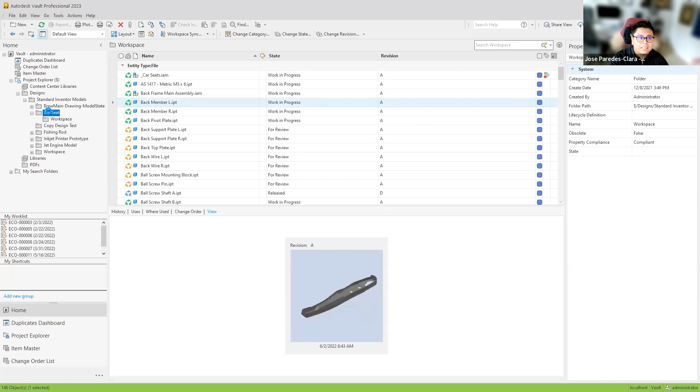I did mention searching. If you're familiar with the folder structure, you can quickly get to your models since they're easily labeled, and you'll get to the right place. But if you're at the very top or you're new to the folder structure, like a recent hire, there are a couple ways you can find things.

There's a quick search up here. If I'm trying to find those car seats, I can find that assembly here really quickly. Or if I'm trying to do a more in-depth find, there is the Find tool up here.

Control F or the button will lead you to a more advanced search. With those properties—whether you have a project number, a die number, a part number, things like that—these are all searchable within Vault.

Again, if you're new to it and somebody tells you to use manufacturing number 123, you can add that criteria. And then if I only want to see the drawings, we can go to file extension and say I only want the IDWs. You can add that criteria.

What's nice about this Find tool is it's an AND, not an OR. So you can make your searches as specific as you want, and it'll only give you the results that fit that description.

Of course, you can change the conditions—'is' will make it more explicit as opposed to 'contains,' which will find it if it's anywhere in that value. But be careful with setting criteria, because the more criteria you set, the narrower the results, and if it doesn't match any files, like you see here, you won't get any results.

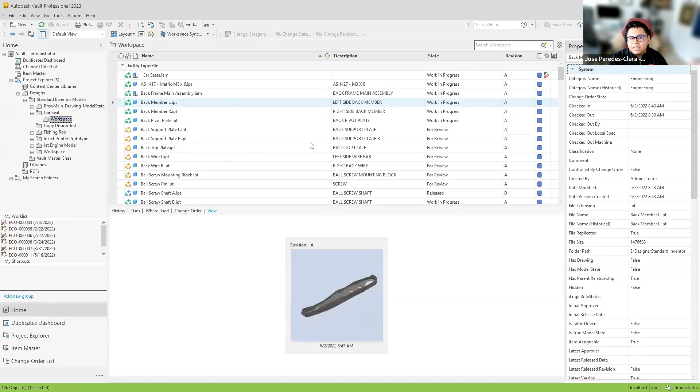So a lot of the things you'll see here are pretty well set up for the properties that they need. But the ones that aren't, you'll see a little red tag here, or a tag with a little red button. If I click on that file and then look at the properties that it has, you'll see that one of the properties that's required isn't filled out.

You can actually set up stage gates, or your company will set up stage gates where this file can't move forward in the release process until it has all the required properties. That's one of the biggest things that we like to configure too. Description,

all the files that you're creating, all the files that are added to the vault should have a description. You should know what they are or what they're for. That way they can either be found inside of the vault by searching, or if you do have smart numbering going on, they're able to be found a different way other than just by their number.

So by setting these required properties, when you try to send it forward, it should stop me. So if I try to send it here into review, it'll pop up a window. So let's say I'm just working as a regular engineer. I'm trying to get these car seats approved, get these car seats reviewed. I'm trying to send the assembly, but it'll pop up a window.

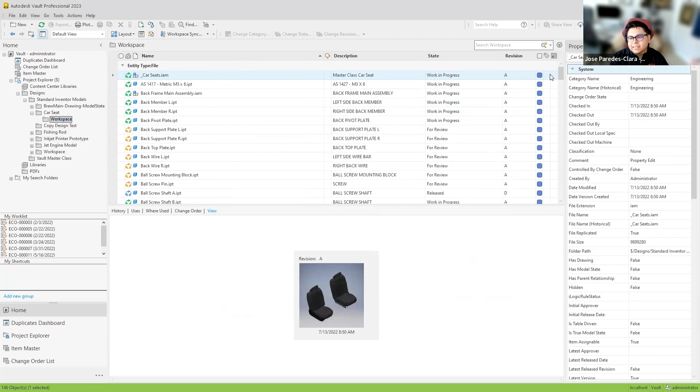Now that I updated that description, you'll see that the tag went away. It's compliant. So if I were to come in here and change the state to review, it'll go ahead and let me. You'll see that now that it's in review, this file itself is locked. And that means I can't check it out. So if I were to check it out here, nothing happens.

This is what happens to ensure that the file is being reviewed. But the file is the same for everyone that's reviewing it, right? Last thing you want to do is submit your assembly to review, our people that are checking it look at it, and there's changes to it. Somebody else went in after you checked it in, after you made your review. Somebody else went in and made changes. That's not something you want to deal with. That's not something you want to have to worry about.

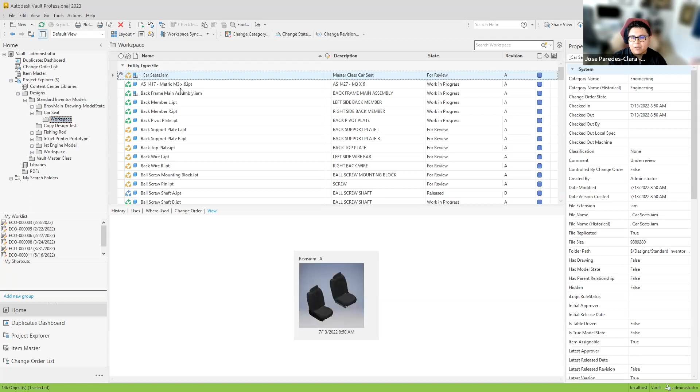So when putting things into review here, it'll lock that file, make sure that, hey, the last time it was modified was, let's see, it would be July 13th. That's the last time it was a work in progress. I edited some properties. That's pretty much what it did before it went into review, right?

You can always keep track of it. That's another thing about Vault. It keeps track of the history. You can always backtrack and say, well, I made this modification on July 13th. Here's the proof I made the edit.

So, you can keep track of that. This would then go be reviewed by certain people, make sure that the engineering is sound, the model looks good, things like that, before they would come inside of Vault and change the state to released. Once it's approved, it goes into a release state.

And this again will have some... Oh, yeah, we'll talk about this in a bit. So released will have some things that, once a file is in a release state, we will have some other options of displaying it or showing it, primarily in the thin client, which we'll talk about in a little bit. But this is another thing that we can do during our stage gates.

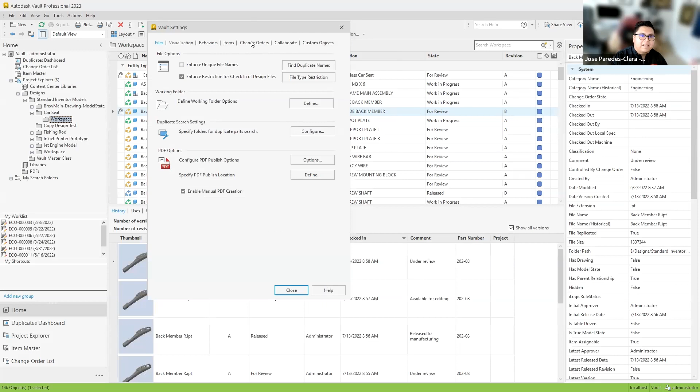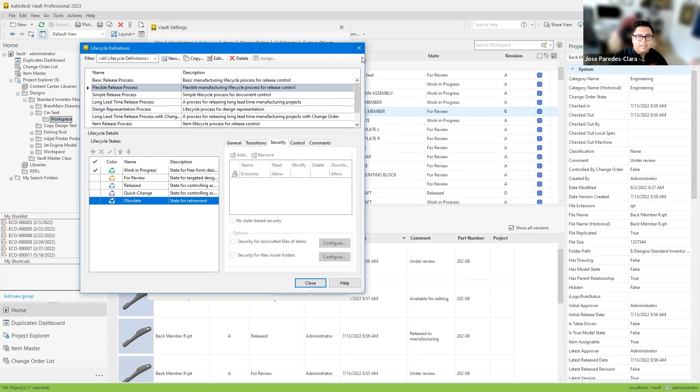As far as configuring - let me go ahead and move this. So yeah, you are correct, my bad. I think we are catching on that in the admin section. We'll go more in depth as far as what Alan's touching on, all the different options we have in life cycles, as far as security and how these states interact with each other. But we'll go more into those options in a bit. And we talked a little bit about required properties - this can all be set on the back end with certain criteria.

Hey Jose, can you cover a quick change? Yeah, so let's go back and talk about this one here. Let's say quick change is - let's put this in released again.

Quick change is a state usually reserved for certain people, sometimes admin groups, sometimes power users inside of Vault. The way it's used typically, I would say not for models themselves, mostly for IDWs, or drawings specifically, DWGs as well. That state is used for things that I would say are clerical errors, things that need to change on the model that don't change the form, fit, or function of the model.

Typos, things like that. What that does is it makes the file editable again without bumping the revision. So this will go into quick change - it'll keep it at revision B, but it can be checked out now. So if I come in here and check this file out, I can make changes to it, make edits - issues in the title block, typos, information that's missing can be added in quick change.

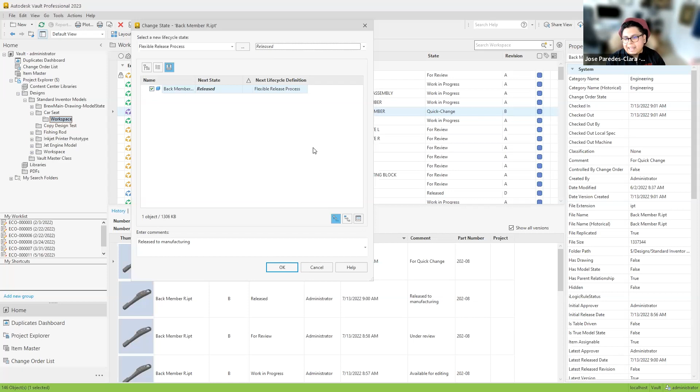But once it's inside of Vault again, you can skip the review process and put it directly back into release. It's a powerful tool, but it's also very dangerous, which is why it's usually limited to certain users, power users, or administrators. What I've seen done is one of your Vault administrators will have access to this state. So typically, if something needs to go into quick change, they'll make the modification once they deem the change necessary or valid, then review the change once it's made and put it back into released.

Once it's in released, again, it'll go back into B, or it'll stay at B at released, and you're able to kind of keep it locked at that point.

All right. Thanks, Jose. Yeah, no problem.

Any questions we want to take care of right now with life cycles? Anything? Again, those of you that have taken Vault classes in the past, it can get a little long here with Vault Pro or Vault Basic. So any questions that you have, please feel free to ask them. We'll go ahead and take care of you guys. All right.

Let's come back and pretty quickly review what we went over in the first portion there. Just the baseline that we talked about with Vault, checking in, checking out, available in Vault Basic and Vault Pro. Allowing you to have version control, be able to keep track of all those changes that you're making. Every time you check in and check out, it creates a new version.

You're able to view an older version if you ever want to, see the changes that were made, keep those differences and view them, checking in, checking out, keeping that version history. But then also keeping revision history like we went over with the life cycles. You're able to keep track of those revisions, when they're released, when they're approved, be able to maintain those and view them whenever you need to, as well as track when those were released, when those were approved.

Let me double check something here. Sorry about that, we should have seen a lock come up. So if I go to the life cycles, and again you can separate these life cycles based on categories, but let's check security. Oh, in review.

Yeah, so that's something to keep in mind when you're deploying these life cycles. You want to make sure that you're testing them. When you go through these here, you want to make sure that you're applying these permissions to the files if it's in items. So that's an option down here.

We'll go over it during admin. You want to make sure that if there are certain people, like an admin, that you want to make edits for certain reason in a review state, you can go ahead and add them in here. You want to make sure that when you deploy them, you kind of put these files through the ringer and make sure that it applies properly.

So in here, you'll notice that even though I made the modification in the item lifecycle, the item itself, I won't be able to update it. It's locked.

It'll yell at me, but the file itself is not locked yet. And that's because even though we make modifications to the life cycles, it won't apply those permissions to the file until the next time it goes into work in progress, into that state.

So in this case, if I put it back into work in progress here, again, we won't see any changes inside of the file, but the second time we go into review, we should see that file lock up. I hit OK here and then go to this folder. Now we see that locking permission applied to the item.

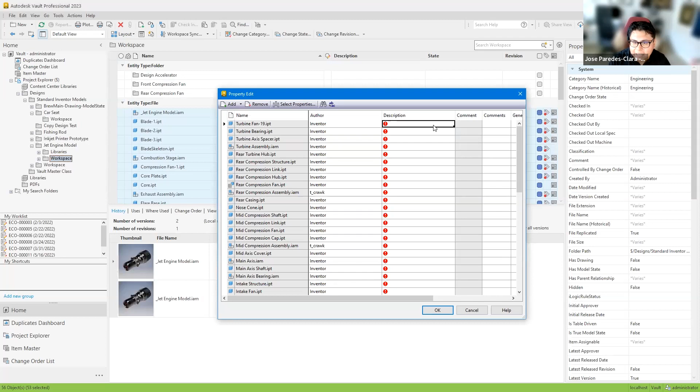So what we're going to do is go back to the folder and make modifications here. The nice thing I can do here is actually select all of these. There is a limit to how many files you can modify at the same time, but this is a pretty small batch of files, and I can make the modifications as I go. So someone updating these properties will have an understanding of what each file is and give a better description. For sake of time, what I'm going to do instead is make all the descriptions a masterclass example, right? So if I do this, I can select this and apply it to all my files.

That's one of the nice things in here, is, maybe not for description but for other properties that may be similar as you're modifying them, the property edit window kind of acts like an Excel sheet, so you can quickly make that all the same across. I'm going to go ahead and make modifications here.

We'll see that once all the descriptions are filled out, we should see these property compliance tags go away, which should let us release it. While we're waiting for that, inside the bill of materials tab, you'll see all the bill of materials at the current revision they're at. Even if changes are made to an item and it's not currently released, the item master will show you the current revision level of all the things in that bill of materials. We'll see how that's important in a bit.

I'm gonna go ahead and release this and everything's gonna be at A, right? So now that we have all the property compliances, we're gonna go ahead and put this in review.

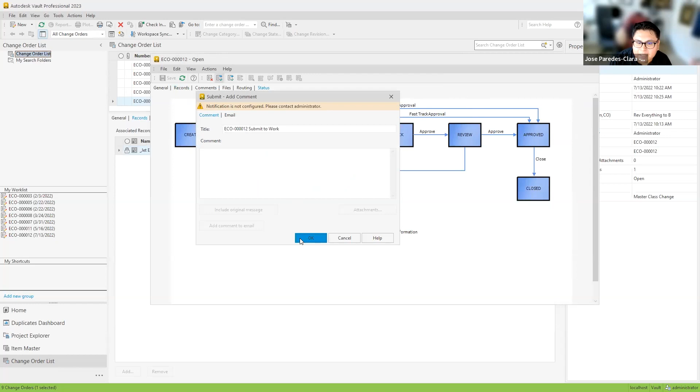If I want to view and respond now, I should be able to come in here to status, and once you submit it into work, there are a couple of options. You can force this—there's a path where, if it's a quick change, the administrator can make the modification, like a clerical error, and submit it to force the approval and make it a quick ECO. Or if it needs to go through the whole process, you submit it into work, adding more comments as changes are made and submitting it forward.

Let's see if I can bring it over—oh, it didn't come. What's nice is even if you have an action on an ECO, it'll show up in your work list. Even if you don't have emails enabled, a small window will show up letting you know when an action becomes available, popping up to say this ECO is available for you to work on. So if we come in here, we should be able to edit this, I believe.

And then now that it's in work, it lets me change the state. So even though it was locked on my item master, I can make the changes to it now in the work state. So I'll come in here and just set it to work in progress. Of course, it's not. Oh, so I would need to add the rest of it. There's an easy way to do that.

So if you say add related on this here, it'll pop up this window and you're able to add the necessary things. Again, it's literally never going to be the full item, the full assembly that gets revved at the same time. So you would pick and choose what items you want to add. So in this case, I'm going to go ahead and hit just that one there. So again, once you hit related, it'll add all the items that you want.

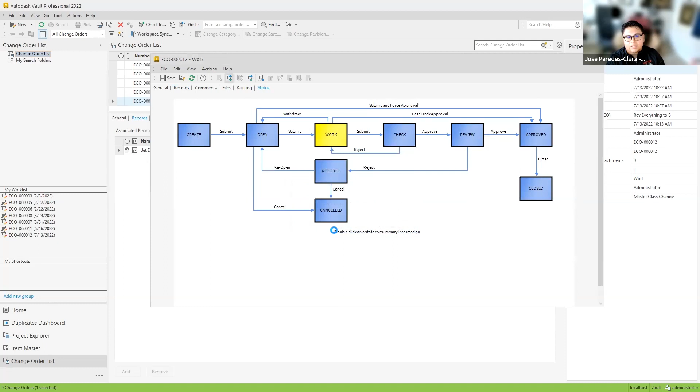And once you put it into work, you can move it forward in the process. So again, I'll move it forward to check. And again, as we're keeping track of comments, you'll be able to keep track of when it went into each state. So we're going to go ahead and just keep going through this. We're going to approve the change order. Again, we're keeping track of what's happening here. And then the last thing here is we're going to go ahead and approve this as well.

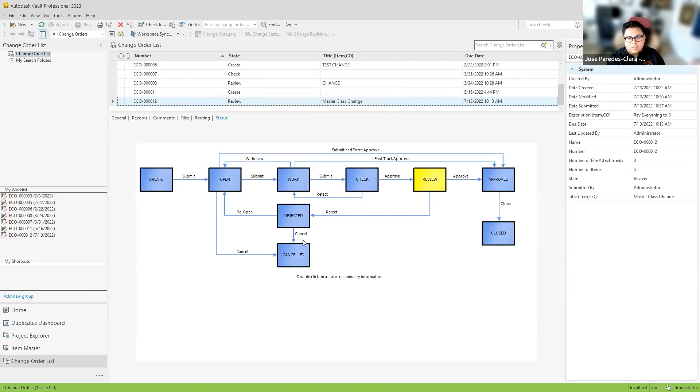Oh, all right. Forgot about that portion. I meant to remove Eric as an approver, because if there's only one approver, I'll be the unanimous one. So here, if we look at ECO 12, I can respond as Eric and approve it. Again, the last approver will get a comment before it moves forward. Now, the last thing here is I'll log back out and log back in as administrator. If I look at this ECO, it's approved and it's locked.

When I go to close this, add my comment, it'll pop up a window. So this is the portion where you would release your items. Unfortunately, it doesn't do this with files. It'll do this with items though. It'll give you a chance to come in here and put your items that you've been working on in released before it goes into the closed state. And that is how you would work with ECOs as well as items. They work a little bit better than ECOs with files, but they can still work in here.

Anything, Allen, Jason, Bill, that you would add on ECOs here? Yeah, that's a good reminder, is that the slight variation between ECOs with items is that we saw the change state automatically pop up, but when you're using ECOs with file-based life cycles, you would do the same thing you did previously when it was in the work state. You would manually change the state to release prior to closing it. And so that is definitely a subtle difference.

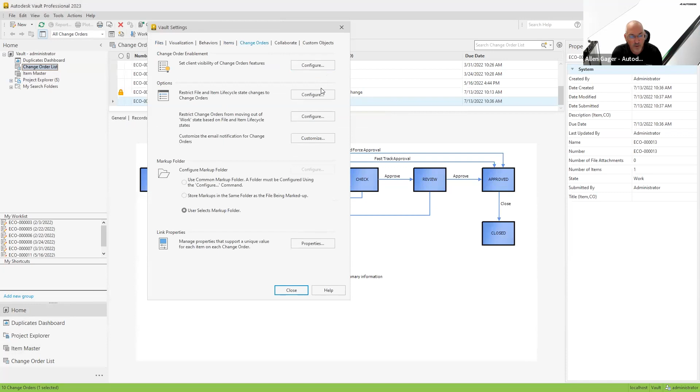So I wish we would have, thinking about this now, thrown up a poll and asked the majority of folks what versions they're running on. I didn't think about that earlier, but in 22, we made significant changes in viewing in Vault. We expanded it in 23. In fact, Jose is gonna talk about this in the next session, but in 22 and beyond, you no longer need design review. That requirement is gone. You no longer need design review for 22 and 23, unless you want to use it. If you love design review and you like that program and have a workflow built around it, you can continue to use it, but it's not really necessary anymore from a viewing or markup perspective.

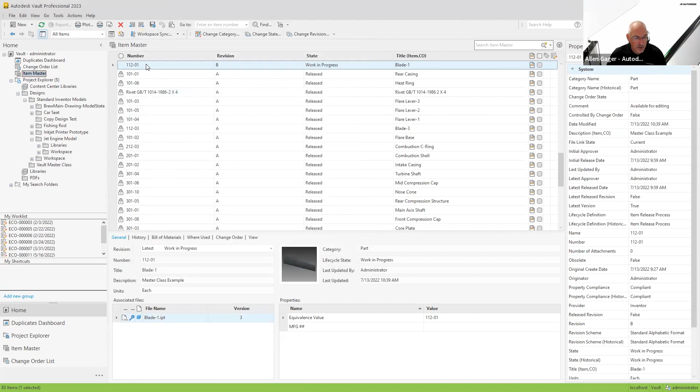All right, so what we're going to do here is, I'm trying to make sure we have the view here. Yeah, that's what I thought. So we're going to go to the item. We're going to change the state here just to make sure that we can. Do you have the new viewer turned on in 23? Yeah, so okay, I'm just going to go to. Sweet.

And then here is when I'll update it. So I'll make sure that it has a visualization file. So you'll need that. You'll need to make sure that those are turned on when you're checking files in. Usually when you're making those modifications, you want to make sure that it's generating new visualization files. That way, when you go to mark it up or you go to view it, you can actually make those

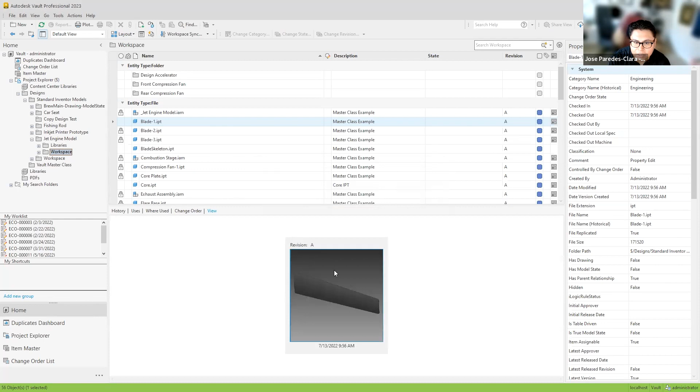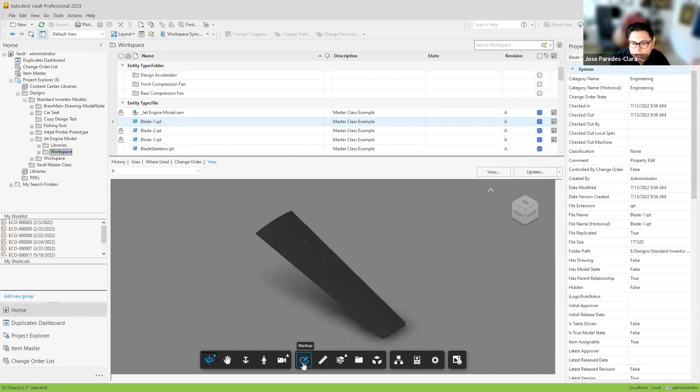changes. So right now we're going to look at this model, and you'll see that it's powered by Forge. So that's one of the biggest changes that makes these markups available. And these are through the thick client. So making these modifications, you want to make sure that you can do that. But yeah, through the ECO or even through the File Explorer or the Project Explorer, you can mark up these tools now. So that's something that is very different now.

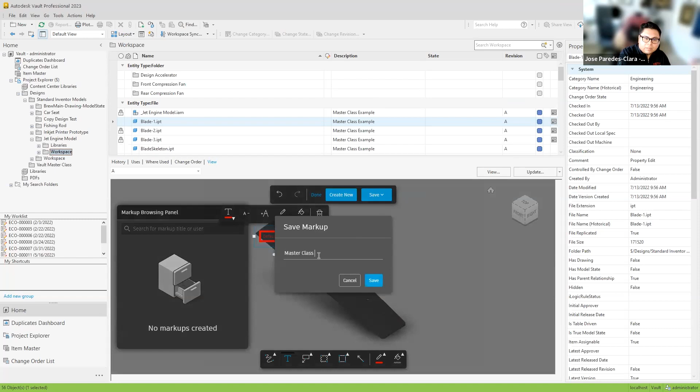Again, you can make these modifications. You can make text boxes, things like that. You can go ahead and make modifications to here. So all these things you can actually save them as data, and what that means is it'll attach it here to this file. And when you do this through the thick client, again, it'll add it to the markup list of that file.

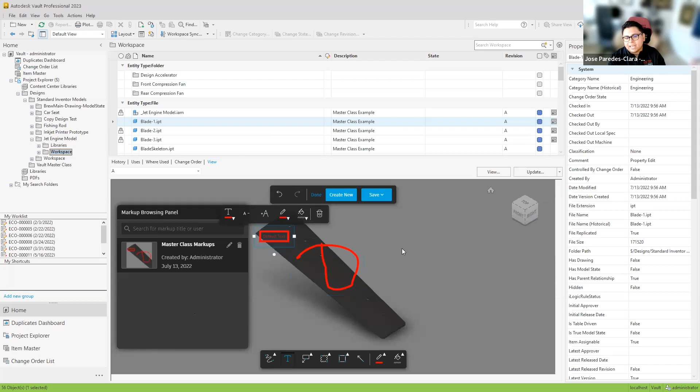You can do some markups in the thin client, which we'll see in a little bit as well. You can view the markups in the thin client, but when you save those, you'll have to save those as a separate image, and they won't be attached to the file itself. But when you do it through the thick client, you can save it to this here. And then if we go to the item and attach that to an existing, so let's see here. Should be able to add it to this.

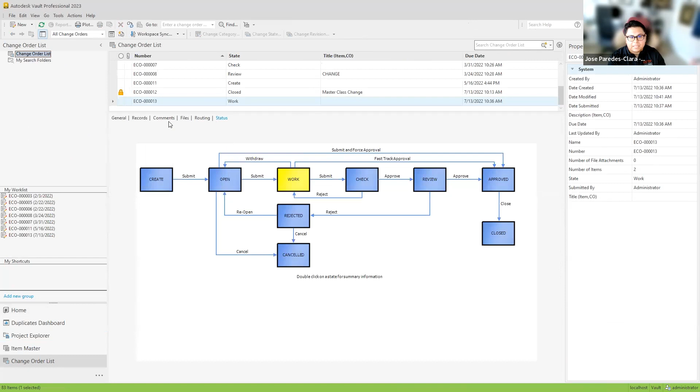So now if we look at the change order, like Allen was saying, if we look at these files, we look at this blade. So if we look at it inside of here and we look at markups, I can see any markups that have been made by anybody else, or I can create my own markup in the tool as we're going through the ECO process. So that's one of the things that's actually really nice.

The markup tool used to be hit or miss in older ones. You could get it enabled, you could create those and save them as, I believe it was DWFs in the past, and attach them to the ECO itself. But now they'll be attached to the files. You can save this as data.

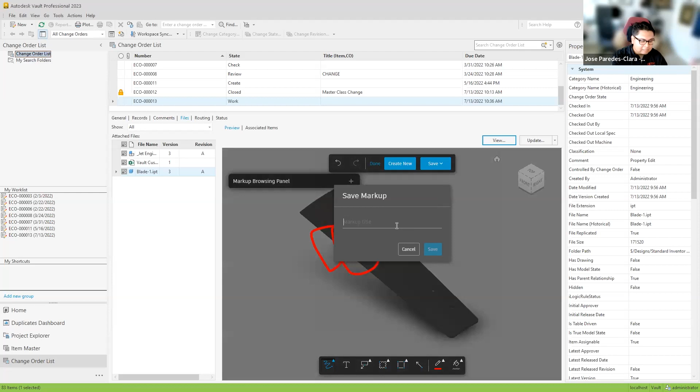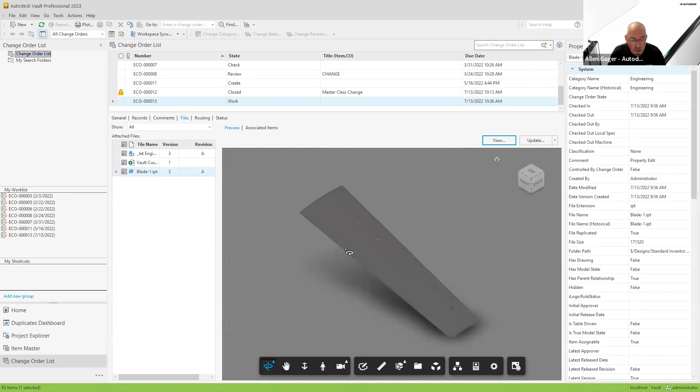Yeah, so we got a quick post in the chat from Claudio. Claudio, the markup is the same whether it's a drawing or it's any viewable in Vault. So Vault still uses the DWF as the viewer of currency. So, as Jose mentioned, you create the visualization file. That visualization file is going to be a DWF or a DWFX, depending on your settings. But that's what we're putting the markups on.

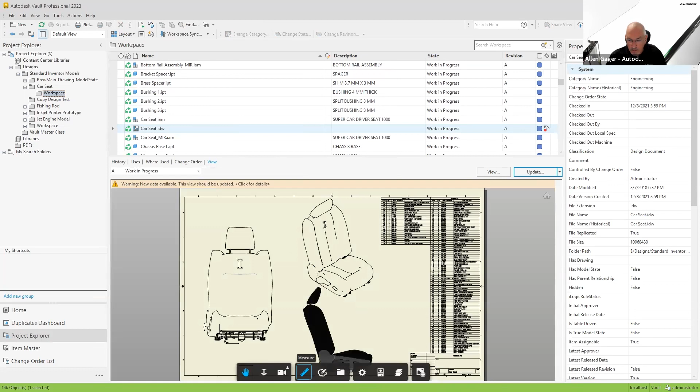So it doesn't matter if it's a drawing or a part or an assembly file or an Inventor IDW or an AutoCAD DWG. The process is going to be the same. Yeah, you would mark up in here. So as you can see, I already have a markup that I used for this drawing back in May, where I can create a brand new markup and save it to the drawing itself. So the tool itself will present itself to drawings or assemblies.

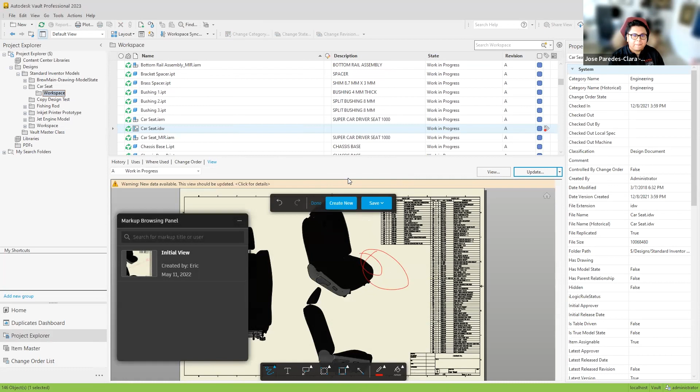If there's nothing else in here, we'll just review managing change. Again, that first tab will be your cover page, all necessary information that you'll need throughout the process of the ECO. You want to make sure that it's available, filled out, and you can customize the properties that show up there. If there's any regions it'll affect, things like that, you can set those up inside that first overview page. You can choose your routings as you go.

Who will be involved with this certain ECO. If it's an initial release, it'll always be these people. If it's a change, it'll be these people. You can always pick those right off the bat. And then adding the necessary items, the necessary files through the process, you can do that as well. And we went through the whole process in approving, releasing your items. Again, the final releasing of items window that popped up will only show up for items. For any files, they will need to be released in the approved state before closing out the ECO to make sure that those get released.

Again, it's a rigid process, but you can leverage it to work as you need. And then I did mention it a little bit, but we're going to talk about thin client here. Now have Phil talk about how we can leverage the thin client.

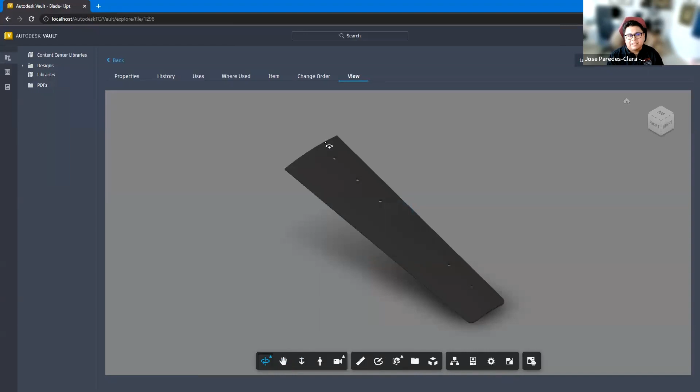Again, this is free functionality you're getting out of Vault Professional that you can distribute to all your users. If I wanted to see the markups, I can see those here. If you wanted to include someone in your process of marking up, whether it be a vendor or someone on the shop, they can create these markups and view the files and kind of kick things off.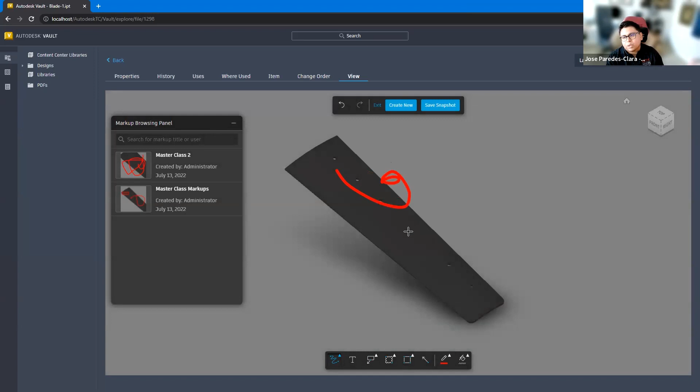So I can go ahead and save this snapshot out on the floor, like, oh, this needs to be fixed, this needs to be modified. The one difference here with the thin client is while we were working in the full Vault Professional client, we were able to attach these markups to the file. In thin client, you'll need to save it as a PNG or image file and send that off to someone with access to the thin client, whoever you want to notify of these changes. That's one of the differences, because thin client is a read-only viewer, so you won't be able to affect things inside the Vault from it. It is a viewer first and foremost.

But again, you'll have access to all these things. And for the admins on the call, one of the things you can do here is change the settings so that you only show released items or released files. So if your shop is using this to access files, and you don't want them to see anything that's not in a release state yet, you can do that, and it'll only show the released versions of things.

You may have noticed some of these don't say they're released, and when I open it, it also says it's not the latest or released. That's a flag letting you know this is going through an ECO—maybe I shouldn't be creating this if it's going through changes, so maybe I should hold off on using it. It still gives you the option of seeing revision A, which is the released one, but it's not letting me see revision B because it's not ready, it's not released.

And then the same thing here. If I'm not seeing any files that are released, I will once I log back out and log back in. Some of these settings need to apply from the moment that they're changed and the next time they log in.

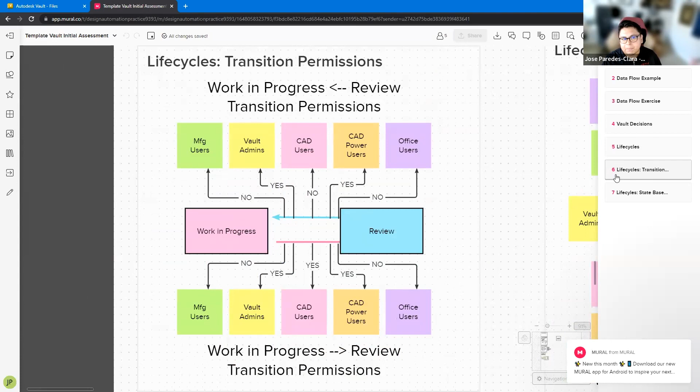So when configuring these things, you'll need administrator privileges, and you'll know you have them when you try to configure. If you go to Tools, Administration, these life cycles, categories, and revisions are all Vault specific. Like I mentioned, some of our customers have different vaults on the same server—these are settings that will be Vault specific. So if you configure a life cycle in your prototype vault versus your production vault, it'll only affect whichever vault you're logged into and modifying.

So you'll go into Tools, Administration, Settings, Vault Settings—and that's how you'll know it's Vault specific settings, because it only affects the one you're logged into.

For life cycles, categories, and revisions, you'll go to behaviors. This is where the workflow portion of Vault is, and you'll see here that you'll have different areas to check in or to work in.

For life cycles, this is where you would map out your workflow. Some of these are here by default, actually all the ones you're seeing here are created by Autodesk and included in Vault. You'll see all the states for each lifecycle process or release process, like simple, basic, flexible. These are just different complexities of your release process.

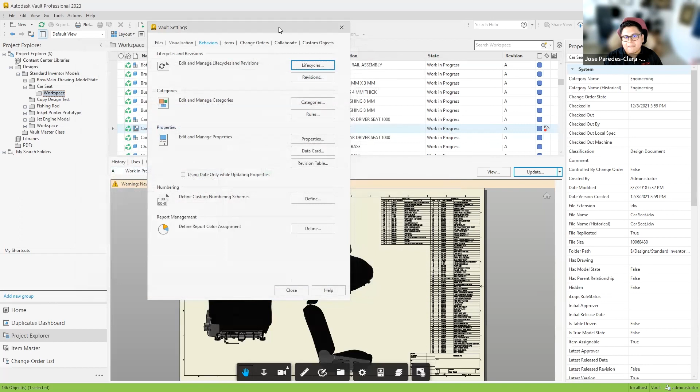So that's life cycles. These are the workflows again that you would have mapped out, you would have available to use within your vault. But in order to have them apply to your files, I made this available to my engineering files. You'll see that my files here are all in engineering, but they're using my flexible release process. How do I set that up? How do I make it do that? Well, that would be through the category definition.

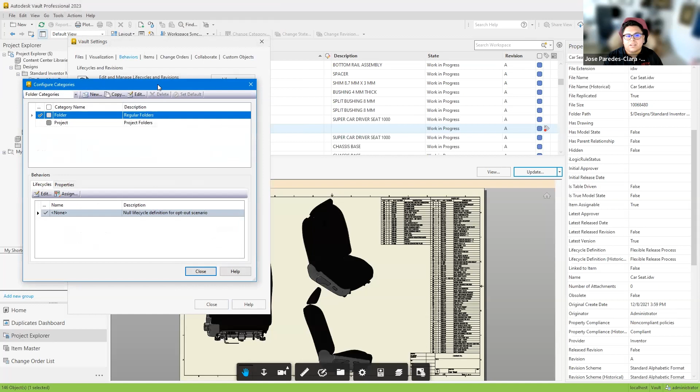So again, in behaviors, you would go down to categories, right? So these are the different categories that exist within the vault. You have folder categories, item. We're going to work with file categories here, but we'll go down to my engineering category. By default, we typically recommend using a base category. So this base category you'll see under life cycles, revisions, and properties.

There's nothing really limiting this file that's in a base category from being viewed. So there's no life cycles to block people out. There's no revisions to automatically apply a revision to it. So this is kind of a catch-all of your categories. So typically we recommend leaving that one alone. But for your other categories like engineering or assemblies in your items, we recommend applying your workflow to them.

In this case, you'll see that under my engineering category, I have 3 different life cycles, or release processes, that I might be able to apply. Masterclass being the one that I just created, as well as none. So if you don't want it to be controlled by a life cycle, like my jet engine that I kind of removed from the life cycle states, you can always have that option as well. But in here, you would apply the workflows that you want.

If you hit assign, it'll take you to the list of different workflows that are available in the vault, even if they're not assigned to this category. I could make them assigned to this category. So if I want this simple release process, I can always add it here and keep it in there.

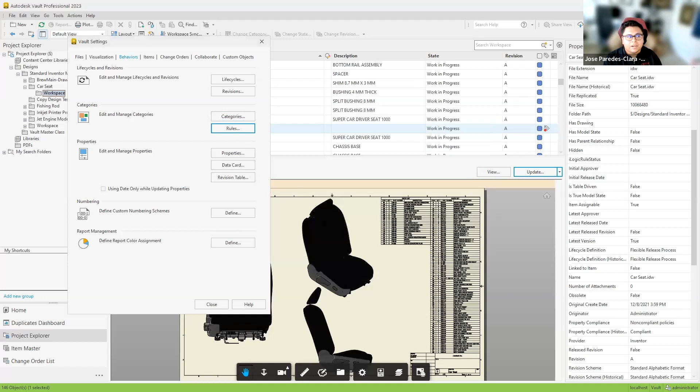Coming back in here, the last thing we want to look at is rules. Categories go hand in hand with rules. You'll see that they're grouped together. So if we look at rules here, how do I dictate what files go into what category? It's a list of rules. So here I have my file rules. Any file that gets added to Vault will go through this list of rules to see if it matches any of it.

The first is design representation. So if it's a PDF or things like that, it'll check to see if it's one of those and add it to this category. And again, we saw the categories themselves apply workflow, revision, properties to it. So this is how you would control which files automatically go to which location.

So for parts, depending on the criteria, if you have standard parts and such, you can set up your own rules. But for any Inventor parts that come into the Vault, I want to make sure that the extension is IPT. They go into engineering, same thing with assemblies and same thing with drawings or even DWGs. So those are my basic rules in here. By default, it won't come with any rules other than design representation and default, I believe.

Those are the only 2 rules that will follow. For engineering and all those other categories, you'll have to set your own criteria. But in here, essentially what you would do is select the property that you want it to look at when it checks it into Vault. So let's say you want description, and then contains, let's say

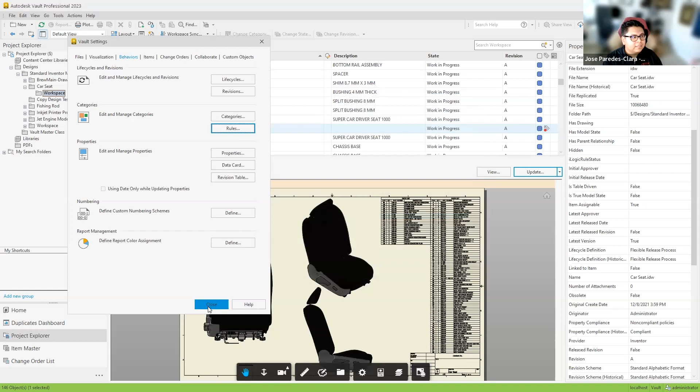Anything to add on that, guys? No, I think that was great. And looking at the time, we've got about 17 minutes left. Yeah. So we'll go ahead and jump into the next thing here.

So again, this is what we went over here: creating states, how to apply it to files, creating those criteria and rules for those categories, and then the default properties and revisions that get applied through those categories as well. Next thing we're going to touch on here is duplicate part cleanup, and I'll have Jason walk us into that.

Yeah, this is a really great tool, especially if you haven't had a CAD manager really keeping tabs on what's been getting checked into Vault. You'd be surprised at how many like files are in Vault, whether someone's used copy design too many times and hasn't cleaned up. But when you start using this tool, it basically looks at a geometry level at how many files are identical and maybe have a different name or are in a different folder.

Because one of the core tenets of any PDM software like Vault is being able to reuse content, and you can't reuse content if you can't find what you want. And so this tool helps you clean up the Vault and identify parts that should be a library component, especially if multiple assemblies are all referencing them. This tool really helps you get a grasp of how many parts are identical in Vault with different names so that you can start to work on the cleanup process.

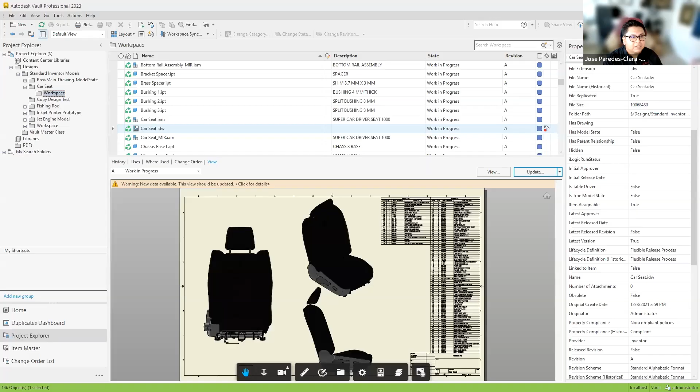Yeah, definitely. Like Jason mentioned, you can't reuse parts if you keep making new ones. So this will help you clean that up. It's actually its own area here. You'll see that I have a 13.8% duplicate ratio. I set this up in the background to tell it where to look.

The way you would do that is through Tools, Administration, and Vault Settings. And then in duplicate search settings here, you can configure which folders it's looking in. I told it to look only in my designs folder, and that's where it'll have to index. So when you first turn this on, it won't automatically know what geometry everything is within your Vault.

So when you first turn this on, it'll send some jobs to your job processor to index the files that you told it to. And that's when it goes through the geometry search. So if you're only looking within a certain project or a certain area of your Vault, this is where you would pick that. You can enable or disable it; by default, it'll be disabled. So just make sure you're picking the area.

Maybe if your Vault is 1 terabyte, 2 terabytes, you don't want to go through the whole Vault at once. Maybe you want to concentrate on newer designs, newer projects, things like that. You can select the folders that you want to work through. Once it goes through the indexing process, what you can do is view the report of those duplicates. So that's what's nice about this duplicate dashboard: you can view a report of the files that it found and then use it as a checklist, right?

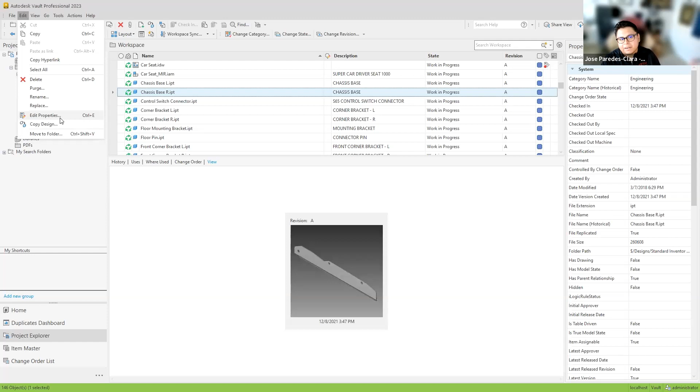So, maybe they're oriented differently, things like that. You can do that more specifically through Inventor or in mass through Vault. Something to keep in mind here, though, is if they are oriented differently, it'll give you a warning. It'll let you know, hey, some relationships or mates may not be resolved correctly. Next time you open up the assembly or subassembly, you might need to do some fixing there. But again, very good tool to clean up your Vault.

Ideally, again, you're setting it up properly the first time with the CAD administrator, making sure that your standards are being followed so you don't run into situations with duplicate geometry. Again, enabling it in Vault, you'll have to make sure that it indexes those files in the area that you told it. You'll be able to have a report based on the different geometries. It'll separate it up into groups for you. And then you'll be able to use that replace feature in Vault or go through each assembly individually and change them as you go.

Reporting. This one, I'll be honest, I overlook it all the time. I forget that we have it in there. But it is baked into Vault, and it is a great way to get a snapshot of what's going on in your project. I know we're getting a little tight on time, so that's all I'm going to say on that. But it's in the box in Pro, so absolutely check it out. And let's see what Jose has to show us here. Yeah, definitely.

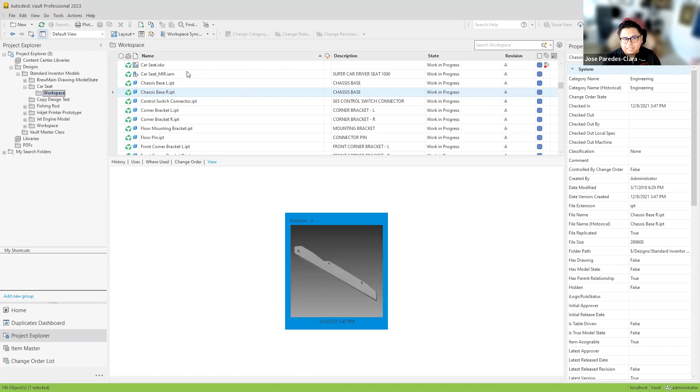So inside of Vault reporting, again, we put it on the admin side. It can be used by the users as well, but on the admin side, because you can export different statuses of different things. If you want to know what files are in work in progress, at what time, you can export a report about that. If you want to know which change orders are in work, you can export that. So typically you would create a search that gives you the items you're looking for. In this case, change orders, I want to know what change orders are currently in work. If I add that to my criteria, I can find that I have 2 and when they're due.

From here, I can run a report of the files or ECOs that I have and export it to a report here. By default, it shows me a duplicates report because that's the last one I used when I did the duplicates dashboard. But if you click on that button there, it'll take you to the default report templates, and you'll see that you have various to pick from. So if I want to show my ECOs by state, I can go ahead and run this report. And when I hit OK, it'll give me my ECOs here.

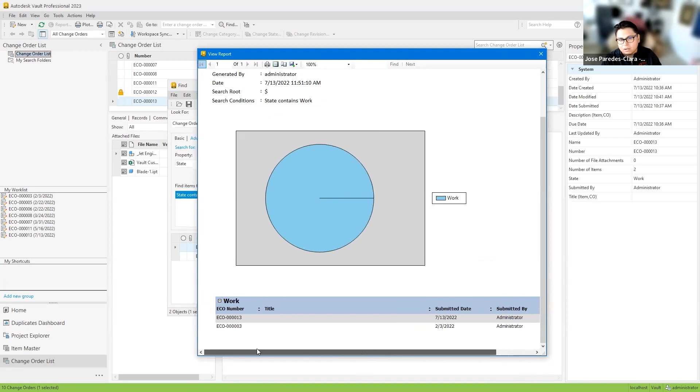I had already narrowed it down to work state ECOs, so my pie graph doesn't show much. But if I remove this and search again, I have a big mix of different ECOs here. So if I run that report again, now you'll see that it's broken it up into different sections of that pie chart, and you'll be able to keep track and know, hey, this one's due today. Why is it still in work? It should be in review, and it allows you as an admin to keep track of that.

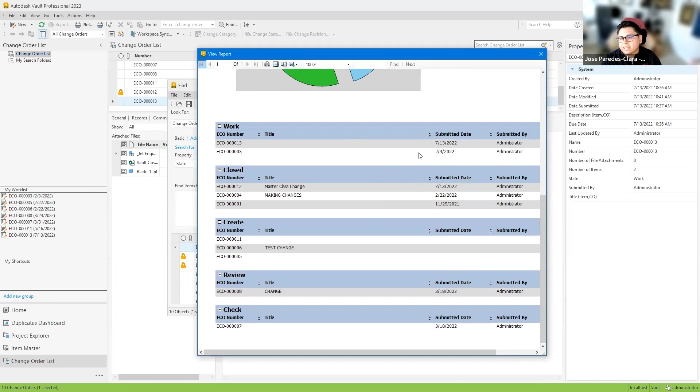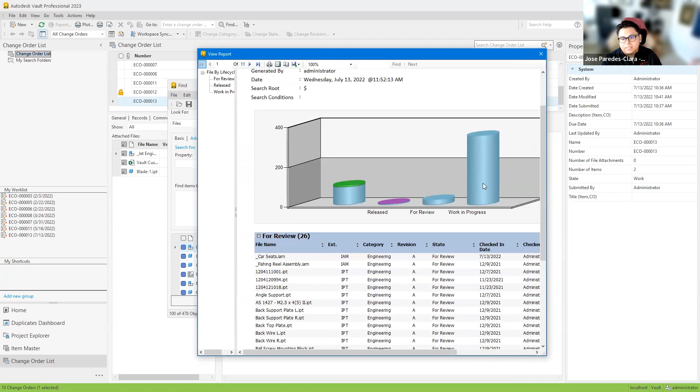Same thing with if we were looking at files, just do a find now. I can run a report on my files and say by lifecycle state on that. And similar to the ECO one, I'll have the state of all my files in the different states that they're in. So you'll see here that this one's page of 11.

Again, you could add different criteria to your search to kind of make this reporting feature give you the exact information that you want in here. And then again, if you want to save this, you could print the layout, or you could print and save it to a PDF if that's what you need, or paper if that's what you really need as well.

But like Alan mentioned, reporting gets overlooked a lot of the times. You kind of forget it's there, but I think it's a very powerful tool for admins to keep track of certain things. The templates themselves, again, you have the default ones that come with it, but you can also modify them to kind of fit your format. But typically the default ones are pretty good at giving us what we need.

Like I said, default templates can set up the criteria to narrow down the information that you get with those saved searches. Again, you can run them on saved searches if you always want to run the same report, but run it weekly and such. You can run the saved search and run a report off of it, and then modify the templates as you go.

And then the last thing we're going to touch on here is server and replication. So I'm going to have Jason take this one.